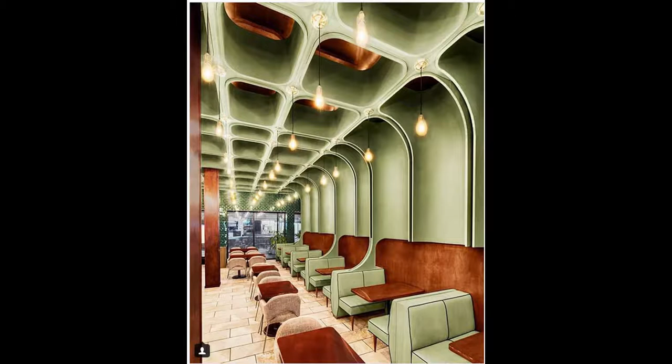I was asked how I would go about modeling something like this with these coffers and these curved ribs in SketchUp. So my first looking at this piece, I noticed that basically 3 ribs and 3 coffer sets is equivalent to about 2 booth spaces back to back. There is one special one in the middle that has like a rib and a half, but that was the odd rib out. I've been looking mostly at the furthest one and what appears to be the closest one. This seems to have 3 ribs and then again 2 booths.

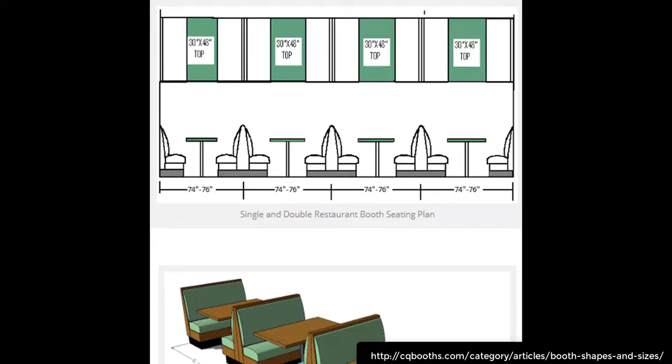So doing some research, I found online that a booth spacing could be between 74 and 76 inches. So if it's 2 booth spaces at 75, that's 150, which means each coffer then would be 50 by 50. So I started SketchUp and I used the rectangle tool, clicked the point, moved my cursor away, typed in 50, 50, pressed enter, and that's the beginning of my coffer.

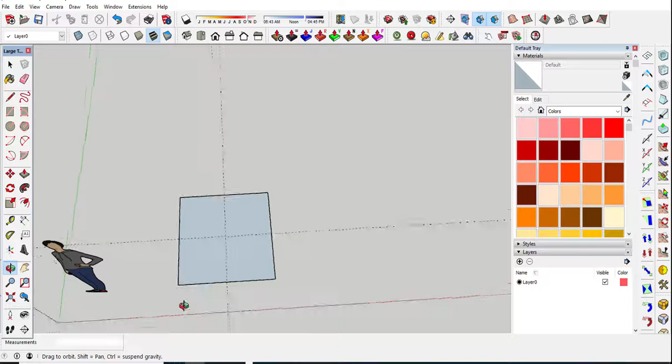Now, whenever I model in SketchUp, I try to find pieces that can be made into components and rotated and so forth. So in this case, this coffer really is one corner rotated 4 times. So I'm going to model only a quarter of the area. Using the tape measure tool, I found the midpoint of each side here. So I will really only do this piece right there when I'm totally done with this particular element.

Using the offset tool, I'm going to click in and go in about 3 inches, because looking at the rib, it looks like from the center of each rib to the edge of the coffer is about 1.5 and 1.5. So 3 inches would be the total amount.

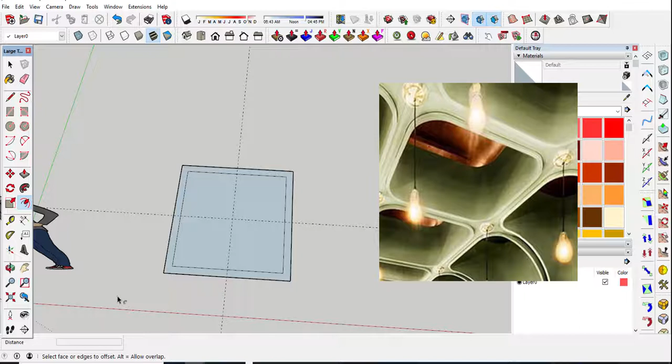Now that I got that, I would then need to figure out where I would have to put the curve here. There'd be a curve right here. Again, looking at it, it looks like it's about a 4-inch radius. Use the tape measure tool and come in 4 inches from this side and 4 inches from here. I will have the center point of a circle for that rib. Cleaning it up, you can see right now I'm starting to get this rib shape going right here.

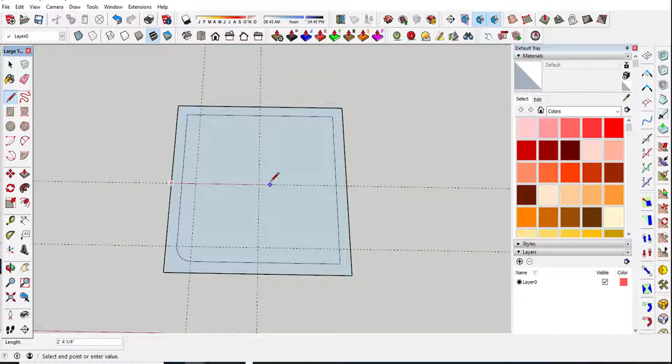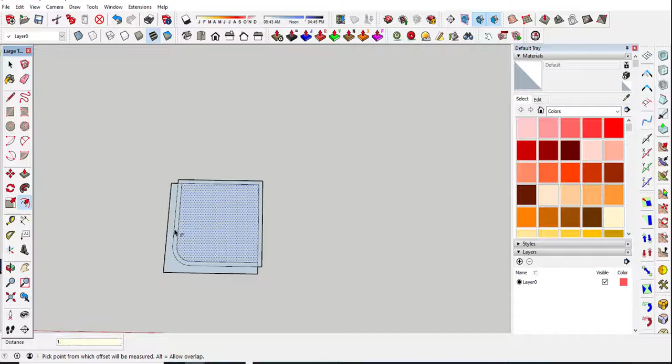At this point, I can also go ahead and get my quadrant started. So all this here we really don't need. I don't need to model it, and honestly I don't need to have it around quite yet. So this rib piece right here, I need to get some thickness to it. So I'm going to select the surface, offset, and offset outwards 1.5, and that will give me the distance I need for that little rib piece. I like cleaning up along the way, so I'm going to clean that up there, and I don't think I need this anymore. So here's my little piece of the coffer.

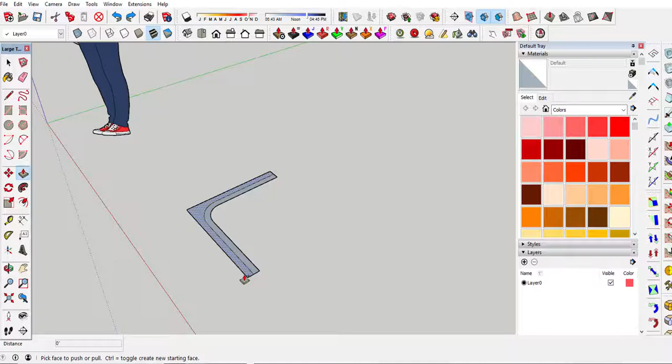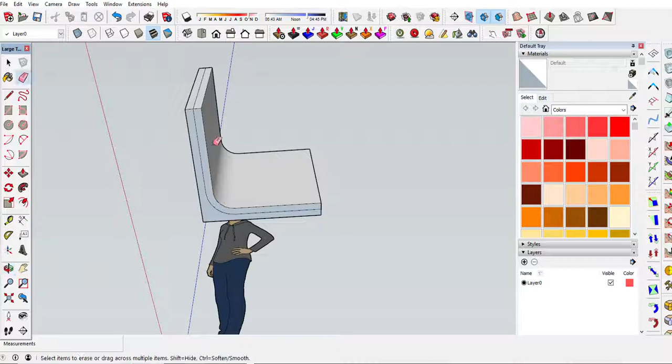So it looks like this coffer is 24 inches deep. So I'm going to do Control Push Pull and get 24 inches here going upwards, and 24 inches again going upwards this way. While I'm at it, I might as well soften this edge using the eraser tool and the Control key, so it's smooth. Might as well do it as I go, clean up my model. And then underneath I've got to reverse these faces. This is the back side, which is the blue colored. Reverse faces. And I'm going to push pull this part down about 1 inch. So this is kind of my quarter coffer.

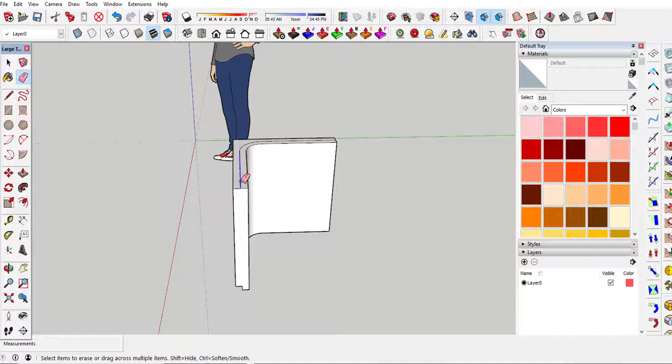To keep things simple, I'm going to clean up the model again. I like to clean up along the way so that some stray lines won't pop up later on. And I can see there's some little guys right here that might cause problems later. And I might as well do some softening here.

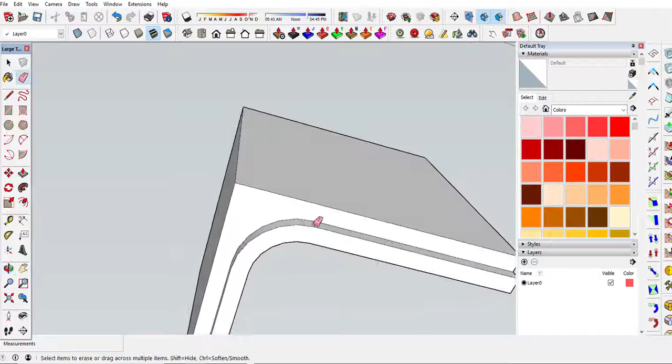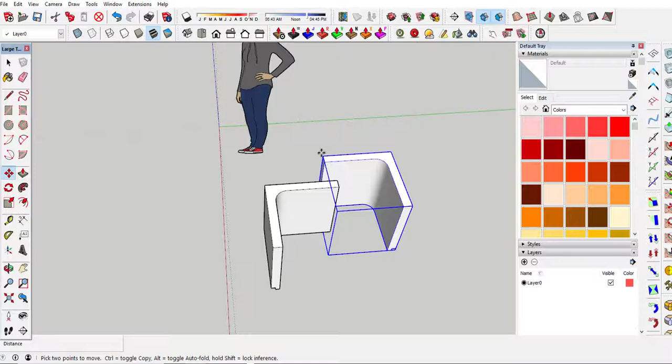Alright, it's time to make this thing a component. Triple click it, right click, make component. I'm going to call it quarter coffer. And so then if I go ahead and do the copy command, use move and copy, and then the rotate tool, 90 degrees, and then move them together, you can start seeing how this coffer is getting made.

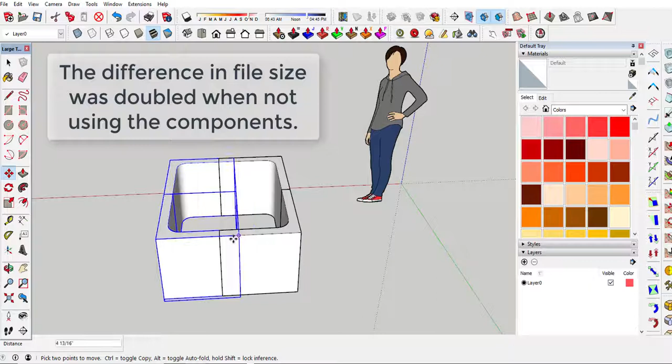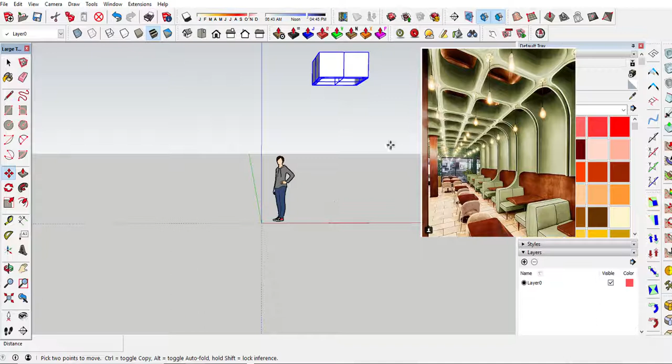And I think it is creating a smaller size model. I'm rotating that 180. A smaller size model than you would have gotten if you actually made the coffer out of all individual pieces. This coffer would then be, I think, about 12 feet, looks like. Yeah, again, taking a look at the picture, imagining a person standing there, you can kind of see that this coffer is about the right height, give or take. And again, that's something we can play around with a little bit once we get it up there.

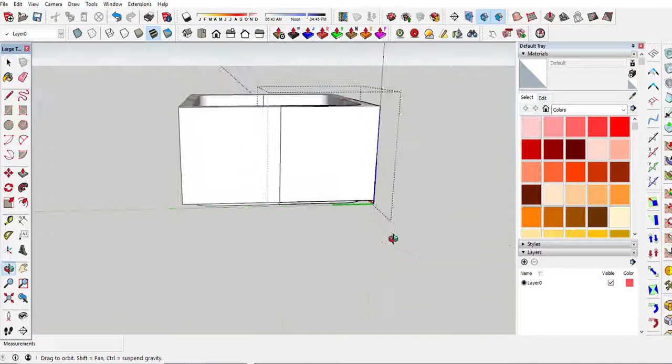Now we've got these basically unsightly joint seams. Of course, we're not going to want to see them. So if I go into one component, I can go ahead and select this area and either hide it, or what I prefer, put it on a layer that I can turn on and off. So here's my layer manager over here. And what I'd like to do is make a new layer. And for that layer, I'm going to call it like no plot.

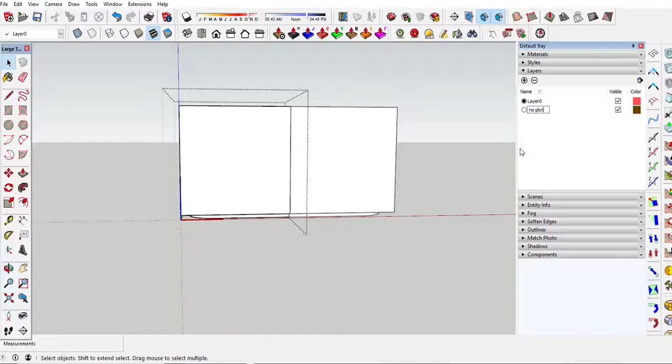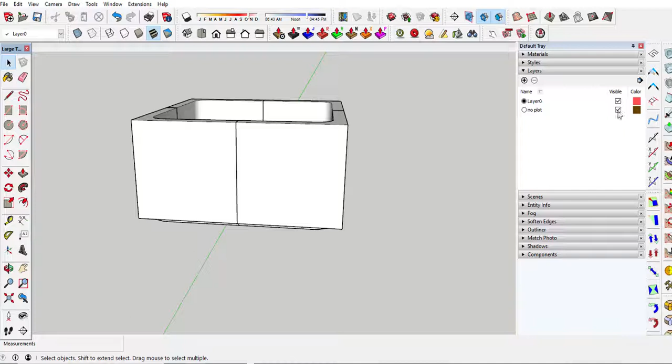And I'm going to select the ends here using the window technique. And I'm going to put them on the no plot layer. I can grab up here, click no plot, go over here, grab this side over here, again, up here, no plot. This is the layer toolbar. And so now if I turn off the visibility of no plot, now we have what seems to be a seamless coffer.

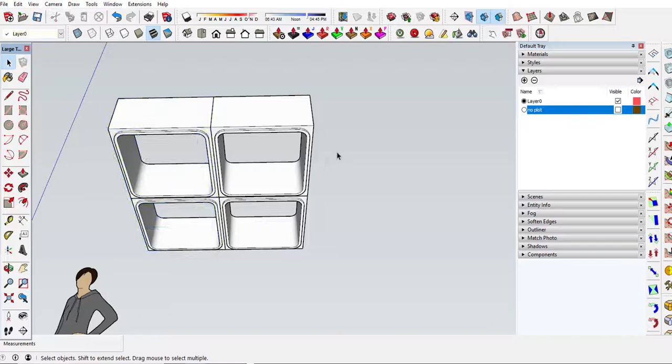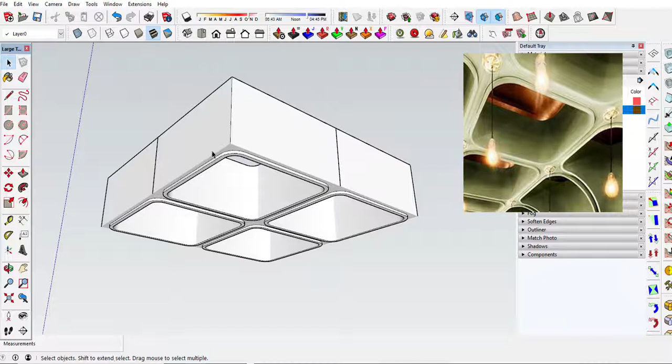If I select this coffer and again make a copy of it and select it again, make a copy of it, you can see that it's starting to look somewhat like the shape I'm trying to grab. All right, the coffers don't have this line here, so just as before, I'm going to go into this setting and select these edges and put them on the no plot layer. And now you can see it looks pretty much like the photograph. I can kind of almost see how this thing's going together.

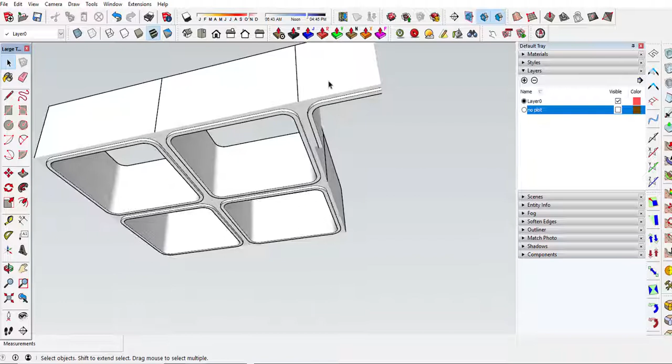So now for the sloping piece, I'm going to select this portion and copy it here. And I'm going to use this to create the curved portion. So what I want is to basically get this edge back to where the curve begins and begin a new piece there. So this is going to become a new element in this model, a new component. So I'm going to select it, right click, make unique. And then I'm going to right click, entity info, and give it a name. Right now it's called quarter coffer 1. I'm just going to change it to rib.

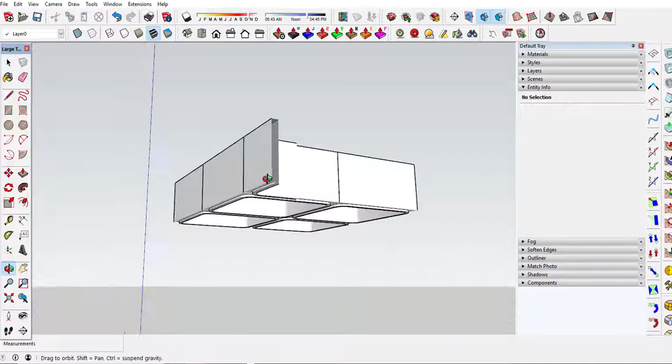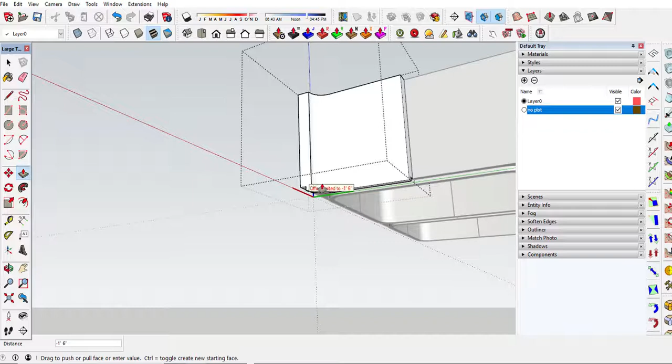So the beauty of having no plot as a layer is I can make it visible now, and so now I have that edge there because I do want to see that edge here. I'm going to double click it. I'm going to push pull this back to where the curve begins. In other words, you'll see it's going to want to stop right where that quarter circle begins, and that's perfect because that's where I want to start my sloping piece.

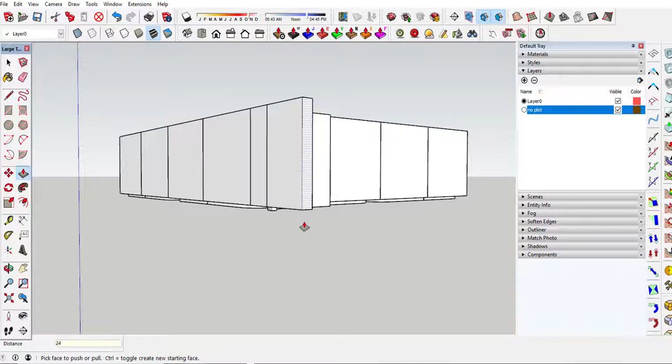So I'm going to get out of that component, and then I'll create a rectangle here, and we'll go over, it looks like 24 inches to where the curve is, and then down to the ground. I'm going to go all the way down to the origin. So I'm going to push pull down until it comes to the origin. And this will be the curved portion of my rib here.

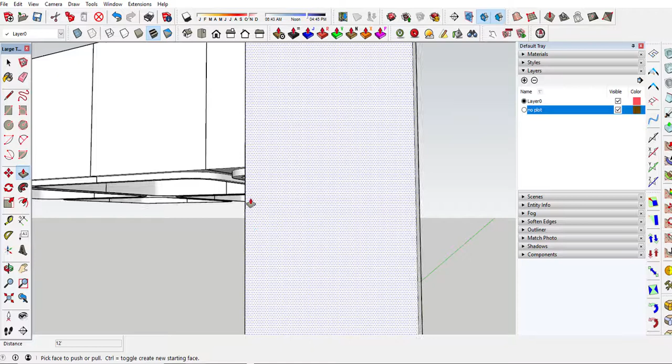Again, I'm going to use the tape measure tool to locate the center of my circle, 24-inch radius circle. So I'm going to go down another 24 inches. And I'll do the circle command, click here, and I'll go straight up to the top. And so now I basically have created an arc that the follow me tool can follow. I can keep it like this, but it's kind of segmented.

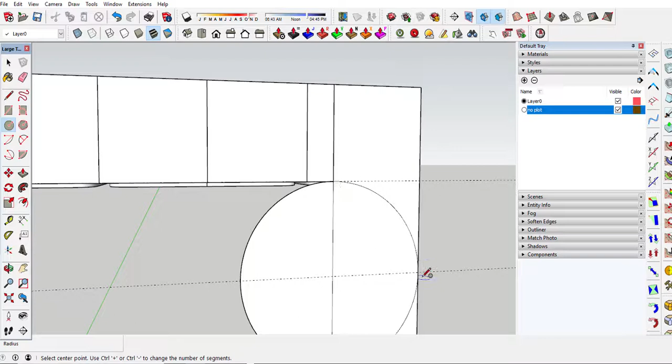So instead of 24 sides that a circle typically would have, I'm going to type in 96S, and that will smooth that curve quite a bit. So while I'm still in the circle command, I can change how many sides the circle has. And you can see it looks much smoother than it did before. Right. So I'm going to go ahead and basically erase these parts because I really only need this line right here. So I'm going to erase all these little pieces.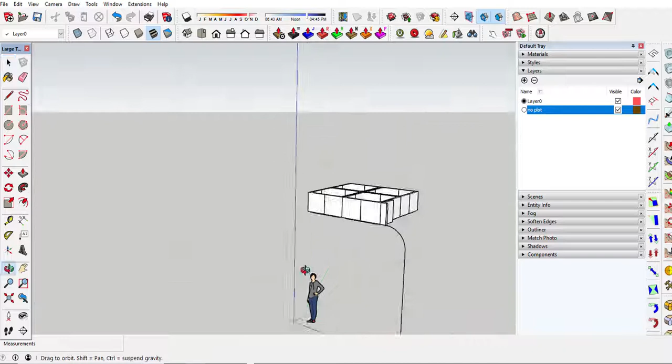Perfect. Down here, I'm going to erase this piece here. And so I just have one single line. And guess what? This spline, this piece here is what I'm going to follow down using the Follow Me tool.

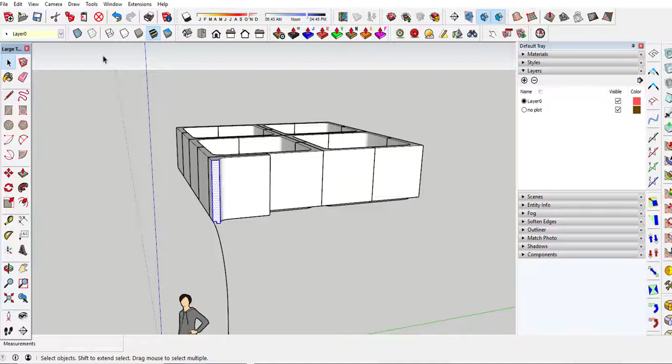I'm going to double click on it, select that surface, and do Edit Copy. Then click to get out of the component. And then do Edit Paste in Place. And so that piece, that profile has been pasted there now. And I'm going to move it to layer 0. I'm going to make sure it's in layer 0. It looks like it is. That's great. That's what I'd like it to be.

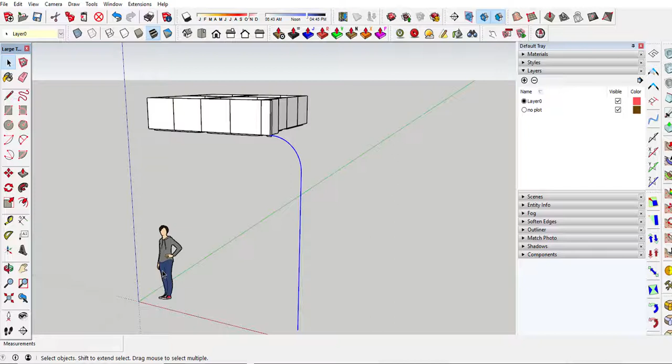So to use the Follow Me tool, I would select the path, which is going to be this line segment. Oh, I don't need that down there. This line segment. Then select the Follow Me tool, which is this one, and then select the shape. So select the segment, select the Follow Me tool, select the shape, and you can see there's the beginning of a rib.

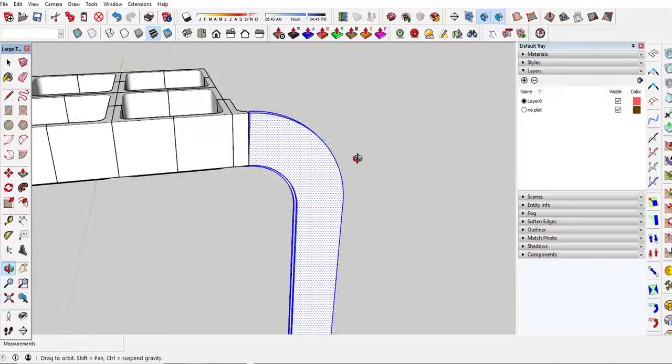Now, it's been flipped inside out, and so I see all this blue area here. I'm going to just select the whole thing. Right-click, Reverse Faces. Again, as you work through a SketchUp model, always make sure that the face you want to see is the front face, which would be white in this particular style.

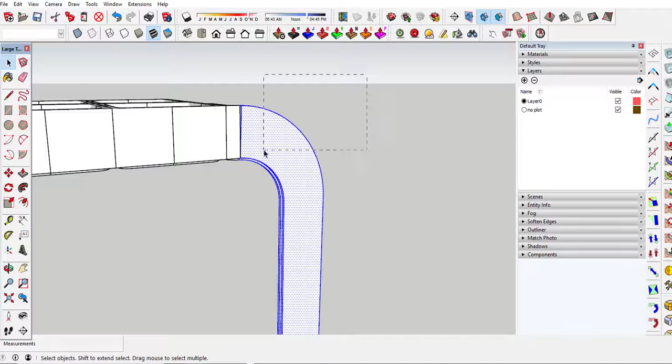Now, this flange curves down, and honestly, that's not how it looks in the model. It looks like it curves around a little bit more. So what I'm going to do is remove that back part. Select that and delete that out of there. Delete this shape out of here. Oops, this way. Yep. I still have the inside rib here.

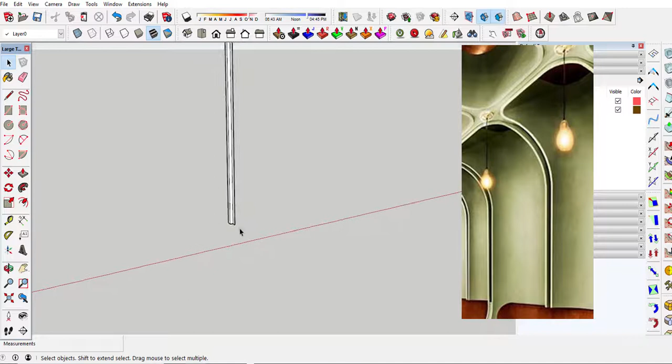So now it looks like the ribs stick out maybe another foot or so from the wall surface. So I'm going to draw a line from here, a foot back. Then I'll go up in the blue, hold the Shift key to lock it in the blue to get the same height as the coffer. Then go back to the coffer, and then go down, and that should create the plane.

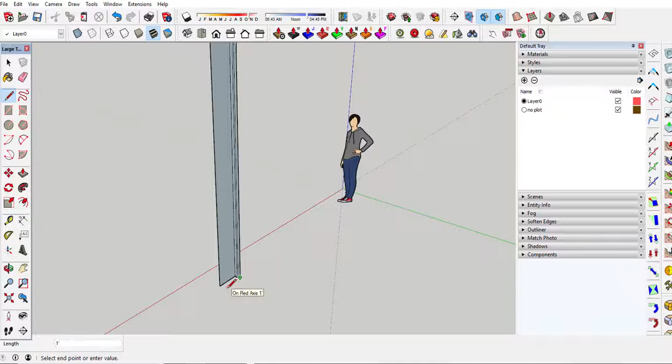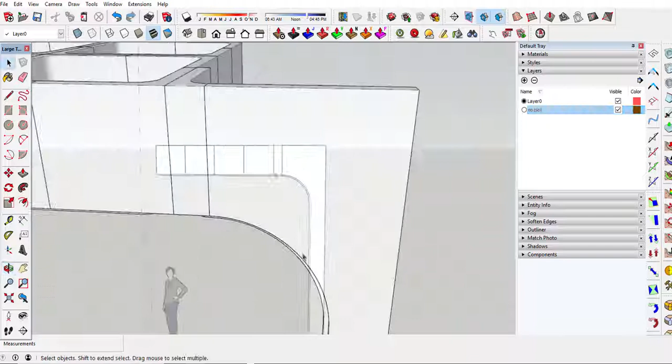Do the same thing to the other side. Select point, go across to line up with that. Go up to the same height, go back, go down, and the piece folds itself up here very nicely. It creates the shape, creates the plane. If I zoom up, I can see that I've got a little extra line on this piece. It kind of showed up as I was working on it. So I'm going to select and delete it so I don't have that line in my component. This is looking pretty good.

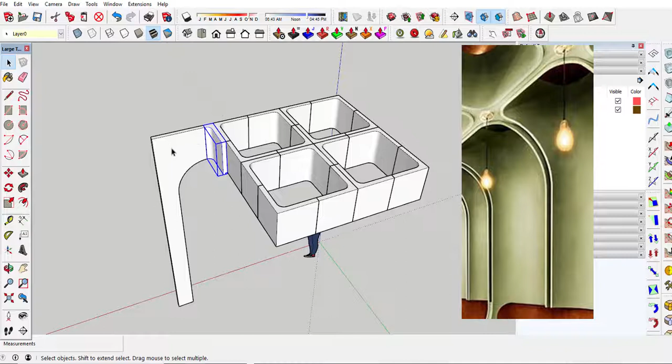Now, one other thing I noticed was that this piece also has a curving element on the inside. So it curves not only around here, but it also curves on the back side a little bit. So I was figuring if I use this shape and I move it out, and then right-click, flip along the red axis, I could then move it back over this way.

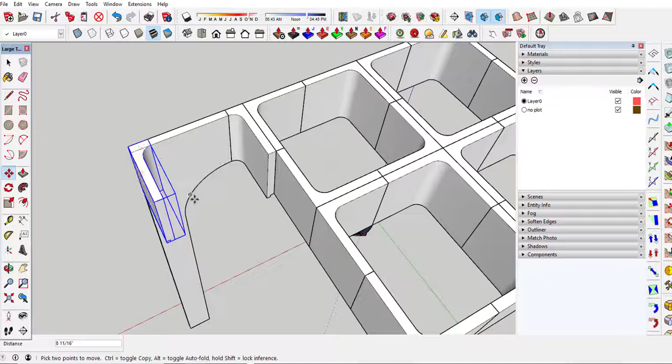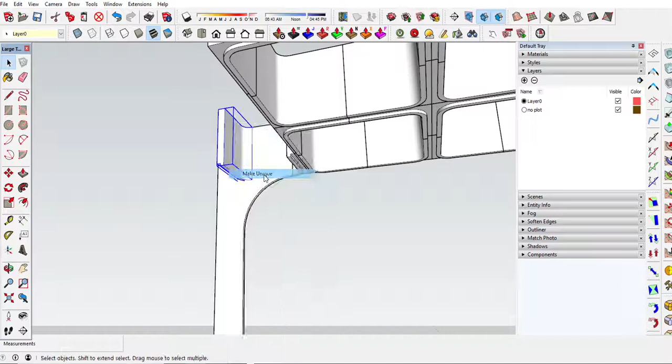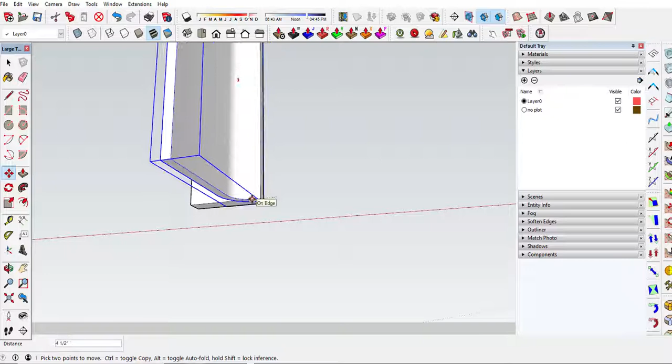And then what I want to do is get basically this curve to line up with this piece right here. So I'm going to grab this flat spot, lock it in the red, and then line it up with this edge down here. Go ahead and make that unique. And then we can double click on this piece and pull this down. And then keep moving it so it lines up with the rib. Because all I need from this inner piece is that curved shape.

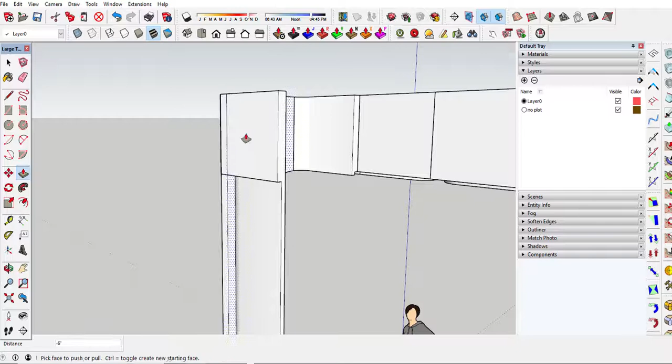You can start seeing it's looking pretty good. We got the curve here, we've got the curve over here, and then I believe this does not go so deeply, so I can move this a little closer. I think this would be that shape. Again, we're just kind of guessing right now how this whole piece goes together, but that looks pretty good.

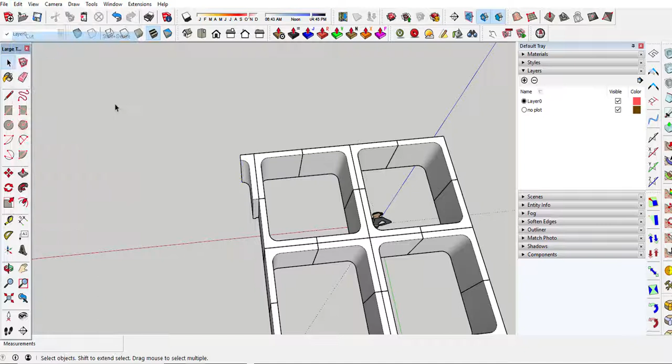I'd be ready now to select these two elements right here, and then do Edit, Cut, go into this component, Edit, Paste in Place, so it lines up perfectly with that edge. Then I go ahead and explode it, right click Explode, and I would just start cleaning it up. All over here, this will be all cleaned up.

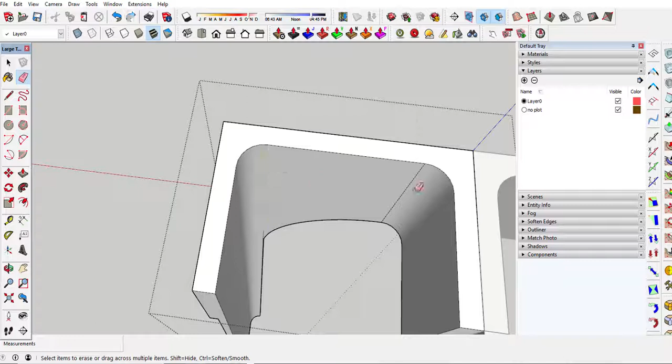This, yeah, I didn't think that was going to happen. This one would need to be erased with Control. So then we'd have to kind of finish the back side, maybe, because there's a curved element here, so I think I have to just draw it. Draw it back in to get the thickness.

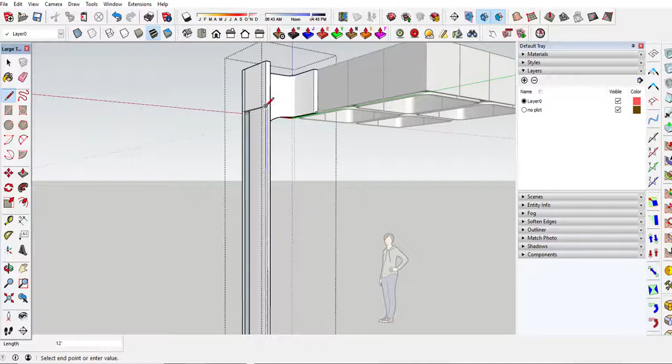And then again, erase where we can. At 90-degree angles, you can erase. And if it's a curve, you'll have to use the control. But all these are straight pieces, so that's good. And this is coming along very nicely right now. I think this is really pretty exact to what I can see here.

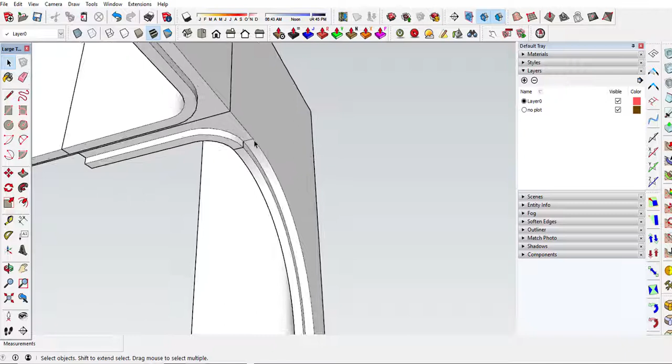The next step will be to try and find which pieces need to be no plot, and which pieces are no plot that shouldn't be no plot, and that kind of stuff. But so right now we're looking pretty good here. I like to clean up as I go. So you can tell that one was not. That's a curve. So I'll use the control feature here, and we'll have to get kind of close to this little thing. That's actually not a line, it's a little gap. I'm going to put a line here, and then we'll go ahead and use the eraser tool to erase it.

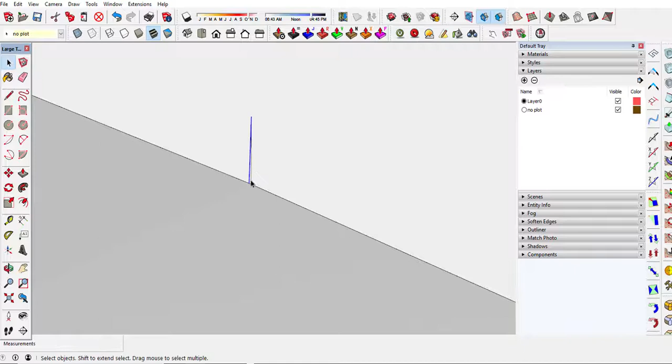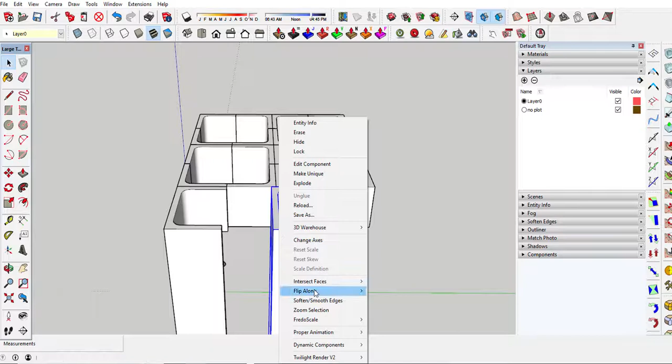So after cleaning up a little bit, I'm going to see how this looks. I'm going to copy it, use the move command, copy it across. Right click, flip along green axis, and then move it to line up with that. Select these two and move them as well. Now I'm going to turn my no plot layer, make it not visible.

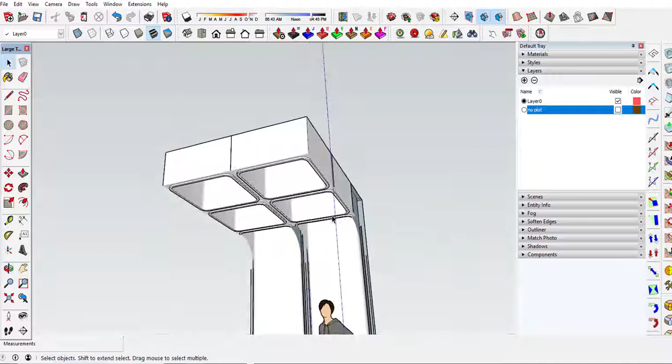And I can start seeing what pieces might need to come back in again. I can see right now that that's not going to work. I've got some pieces that, when I did the follow me, were no plots that have gotten all over the place. So I'm going to turn that back on again. Go back into my component here, and I'm going to select the whole thing. Just put it on layer 0. And now go to no plot and start taking a look and see what parts of the components I need to take a look at.

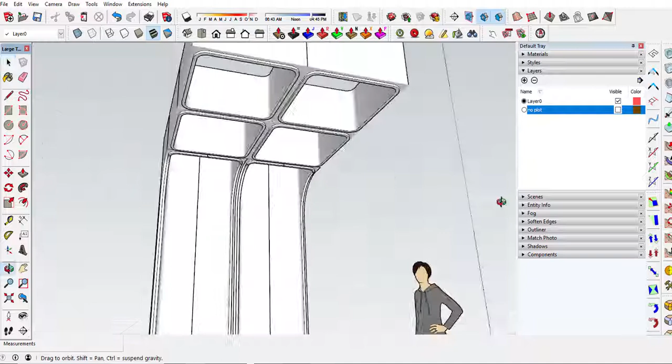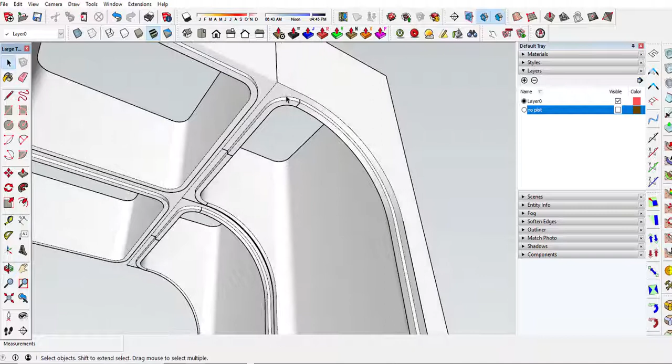Well, this little rib here, I can tell right now. If I double click, I'll get both the surface and the edge. Shift click, and then put that on no plot. All right, so let's put it back on, turn it back off, okay. These little pieces right here need to be taken care of, so double click, and I'm going to select these lines using the selection tool and the control key. And I'm going to put them in no plot. There you go.

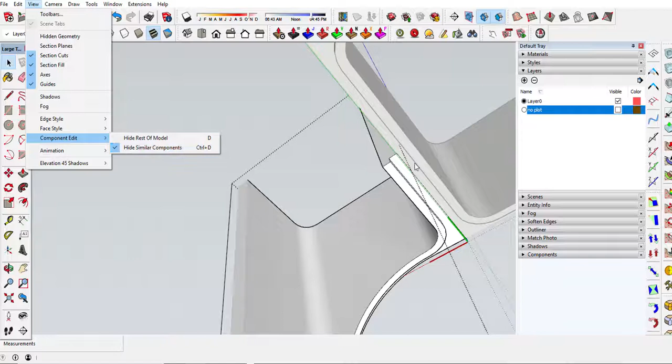Right now I have it set so that if you go to View, Component Edit, Hide Similar Components, I've got that selected so I can get in there and just look at the edges as I go into the component. So here if I double click and hold the Shift key and deselect, all those edges can go to the no plot layer. All right, I'm going to click out of this component. And I'm going to select this line, put it in no plot.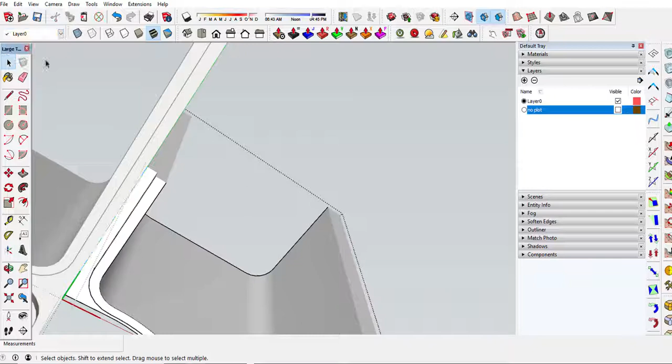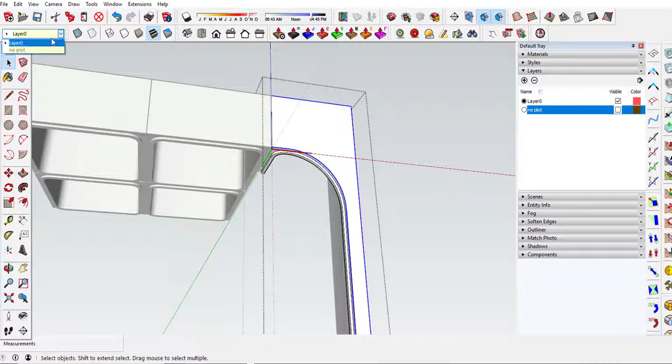This edge here, see how that edge is there? So there's an edge here I need to take care of. I'll double click to get in the component. Double click on that surface. Hold the Shift key, deselect that so I only have the edges. No plot. And there you have it for that portion. And this portion here, I'll double click, select that line, put it on no plot. And I think that's pretty good. You can see that it looks like how it should.

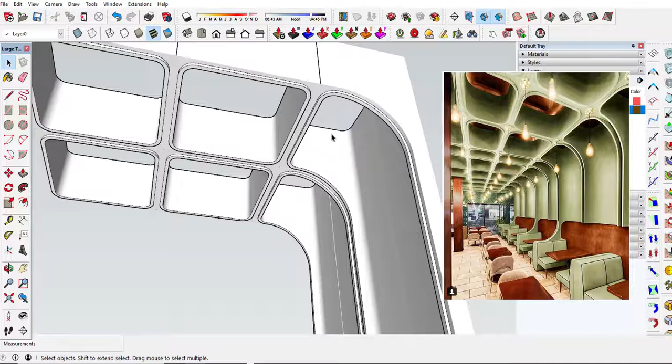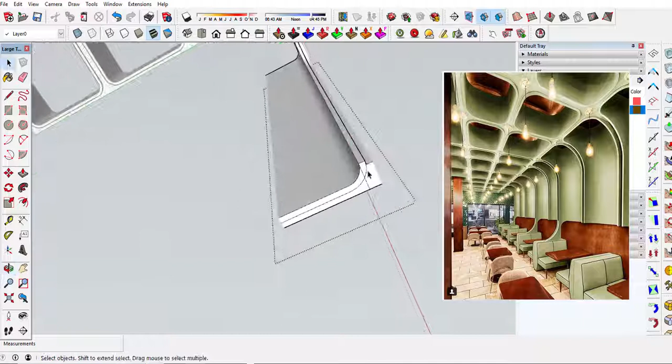At this point now, I can copy this around. One more flange. So this would equal 2 booth spaces. Double click here, and I see I got extra lines at the bottom. I'm going to go ahead and erase these extra lines. I don't need them for this model. At this point, I can then double click in here and pull this up, maybe 5 feet or so, and that would be where the booth backs are. You know, those brown backs on the booth. And there you have it.

This is how some coffers can be made, and this is done by looking at different parts. So 4 of them made one coffer, 2 of them make the rib. And then we bring in components from the 3D Warehouse to finish off the piece.